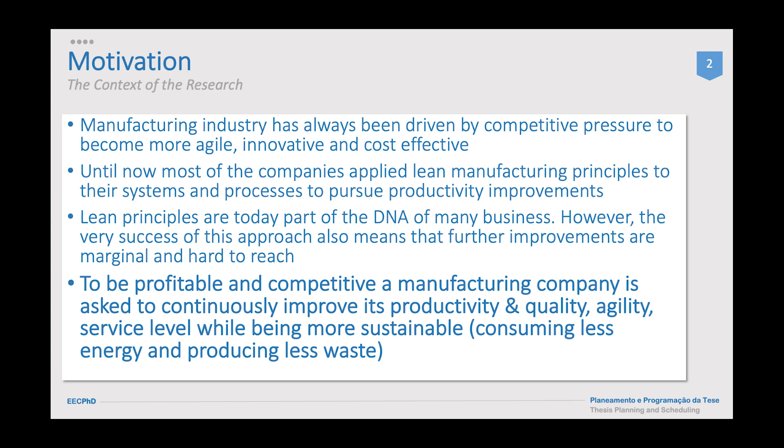However, classical lean principles are losing some of their edge. The very success of the lean approach means that further improvements are marginal and very hard to achieve. Even if lean principles will remain fundamental, there is a need to enhance such principles. The adoption of newer technologies, advancements in data collection, together with automation and artificial intelligence, will enable companies to continuously improve their business. A Google Trend Score analysis shows that Industry 4.0 is expected to become the new productivity imperative, leading operations to the next S-curve of productivity.

This is also confirmed by the fact that 68% of the companies that took part in the McKinsey Global Manufacturing Survey see Industry 4.0 as a top strategic priority. However, the survey also shows that only 30% of companies are capturing value from deploying Industry 4.0 solutions at scale. Most companies are still in the piloting phase, as shown in the graph on the bottom.

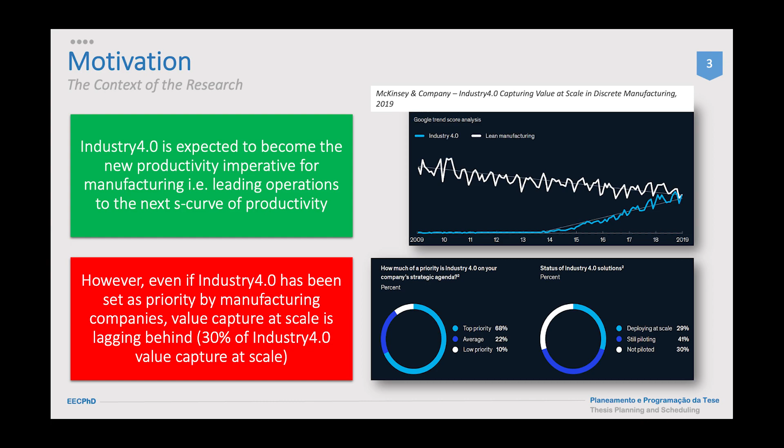Given the motivation, the overall problem is well summarized in the following sentences. The problem today is not product innovation and/or servitization, where the greatest potential is building the machine that makes the machine. Factory today needs to be agile, however agility of a company is limited by its least agile building block. All the layers of the company need to be agile.

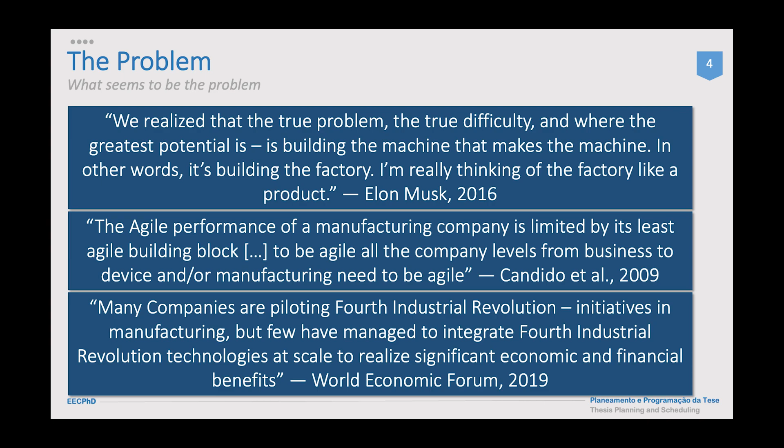To improve agility, Industry 4.0 solutions are the answer. However, very few companies were able to integrate these solutions at scale.

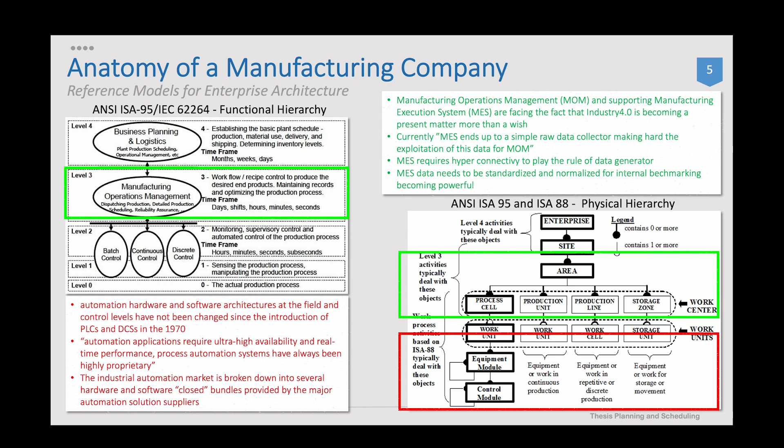In order to frame this work, it is necessary to understand the anatomy of a manufacturing company. For doing that, the standard ANSI ISA 95/IEC 62264 is used to show the functional hierarchical organization of the manufacturing enterprise, and the ISA 88 together with the ISA 95 for showing the physical hierarchy. Here, optimization and overall improvements in productivity can happen in several and distinct levels of the enterprise.

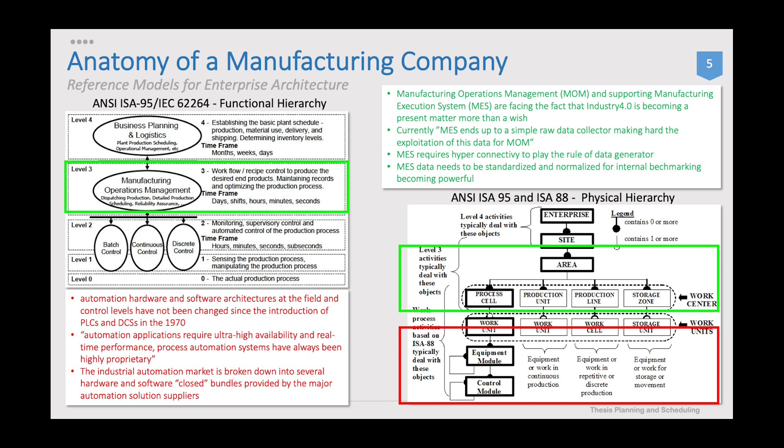However, the focus of the PhD is to deliver agility to the business by acting on the manufacturing operating processes. This means that level 3 of the ISA 95 model is the target for the research.

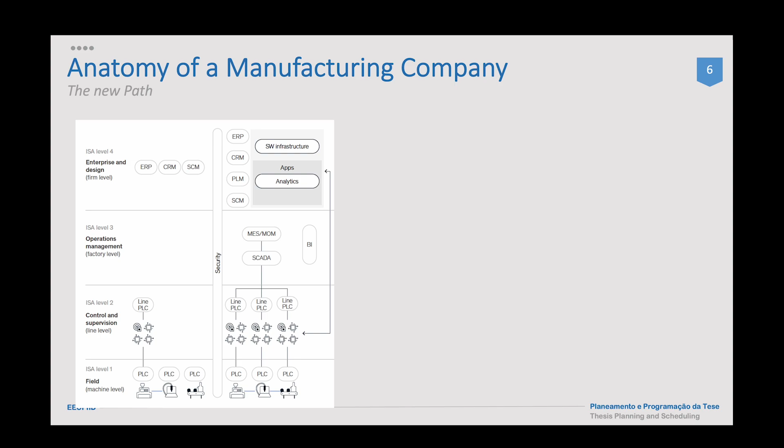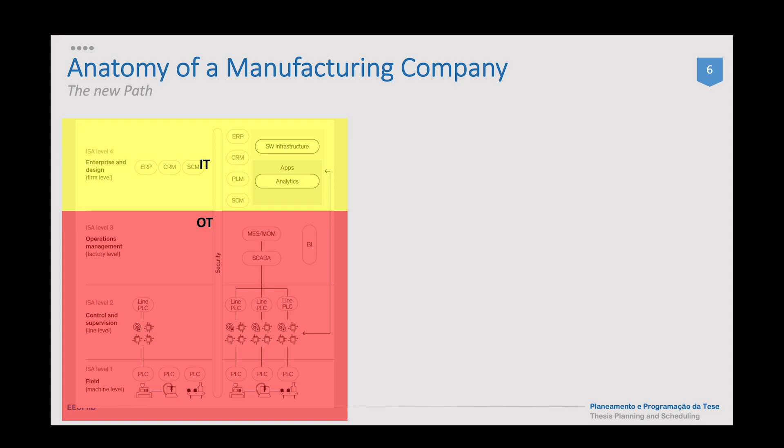Looking at the manufacturing system in a more concrete way, the research is set on this path, moving from the current situation, where the system is characterized by high automation, low connection between the levels, and operational technology deployed until level 3, to an integrated automation stack, where OT is smashed to the only level where it makes sense, while the rest of the system shares the same software infrastructure to support a software platform strongly based on cloud-native technologies.

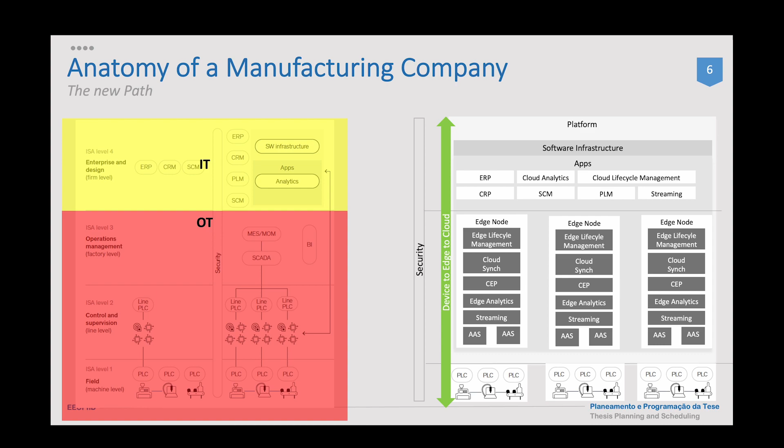Finally, cloud-native manufacturing execution systems represent a pivotal shift in how manufacturers can optimize their operations. With unprecedented flexibility, connectivity, analytics, security, and cost-effectiveness, these systems empower companies to achieve operational excellence and drive innovation.

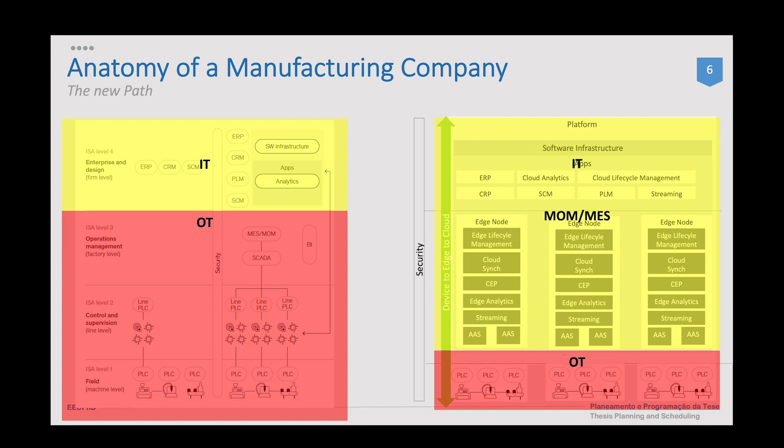With this in mind, the following research question has been formulated: Do cloud-native principles promote the creation of Industry 4.0 compliant advanced MES to support manufacturing operations management?

And the following hypothesis has been set for guiding the research: Cloud-native principles lead to the design and development of fully managed, evolvable, resilient, available, and designed-for-automation software solutions, constituted by modular, easy-to-deploy small capabilities or functionalities. These capabilities or functionalities are distributed across a network of interconnected hardware and software components.

Moreover, to narrow the focus of the research, the following sub-questions have been formulated. RQ1: What are the recurring problems and related solutions in designing and structuring Industry 4.0 compliant data-driven solutions? RQ2: How to properly describe and model a physical asset to be connected in the digital world to enhance transparency, end-to-end visibility, traceability and real-time data availability?

RQ3: What are the most promising cloud-native technologies and tools to use when designing and structuring MES for manufacturing operations management? RQ4: How to adopt modern software engineering practices, pioneered by IT tech companies, to enable agile software development and delivery.

Here is the schedule and envisioned execution plan of the PhD. The following milestones have been identified: 1. Background review and problem characterization. This will trigger the implementation of an early prototype to showcase the idea behind the research.

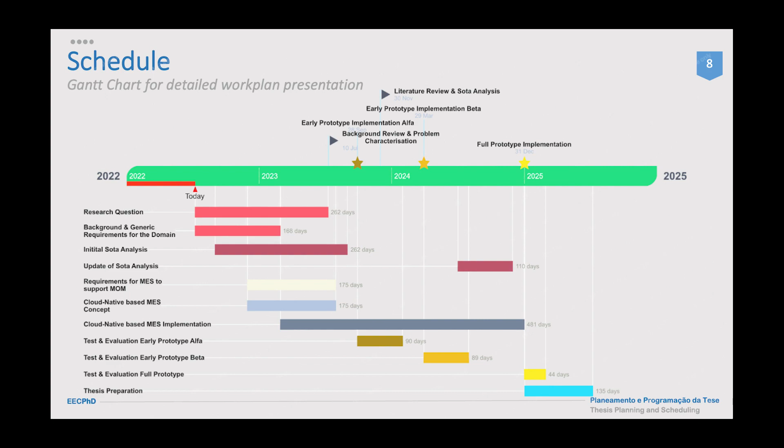The one-page abstract shows the main objective of the research: to create a connected ecosystem where various entities, within a manufacturing or industrial environment, can communicate and exchange data seamlessly. The entities involved can include physical products, machinery, equipment, and human operators.

The foundation of this concept lies in the use of asset administration shells. An AAS is a digital representation or virtual counterpart of a physical entity or asset. It encapsulates important information about the asset, such as its identity, properties, capabilities, and behavior. AASs serve as a standardized and structured way of exchanging data and interacting with assets in the ecosystem.

A cloud-native manufacturing execution system plays a vital role in managing the entire ecosystem. The MES plays the role of operating system while managing resource allocation, discoverability, monitoring, scalability of data collection and provisioning, as well as rolling updates and continuous deployment.

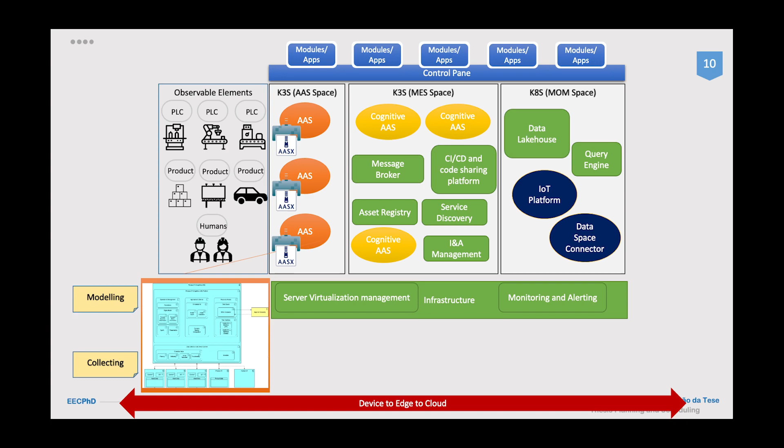To do that, cloud-native technologies will be used. Overall, the solution is leveraging Docker and Kubernetes together to create a cloud-native MES architecture that is highly scalable, portable, and resilient.